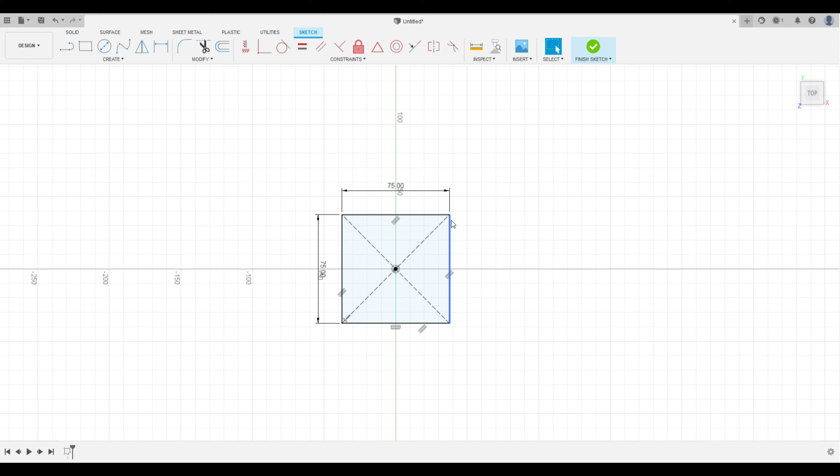Okay, so we're going to jump into Fusion 360 and we're going to jump into the sheet metal tab. Now this just literally needs to be a super simple gusset. So we're going to go with 75 by 75, which for our American friends is 3 inches by 3 inches. Finish the sketch, and then there's my sketch, flange, boom. Now we're going to be making this out of 3mm, so you're okay.

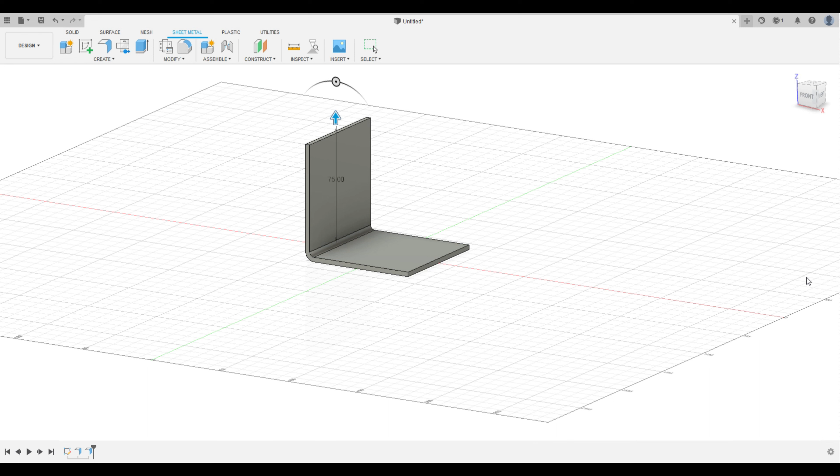Now this is going to flange up 75mm, and wait, I may have screwed that up. We want to bend that on the outside, and then these two sides we want to bend on the inside, which is going to be there. Okay, cool. Now as you can see, this then gives us tabs here where we can weld it. I'm going to hit OK.

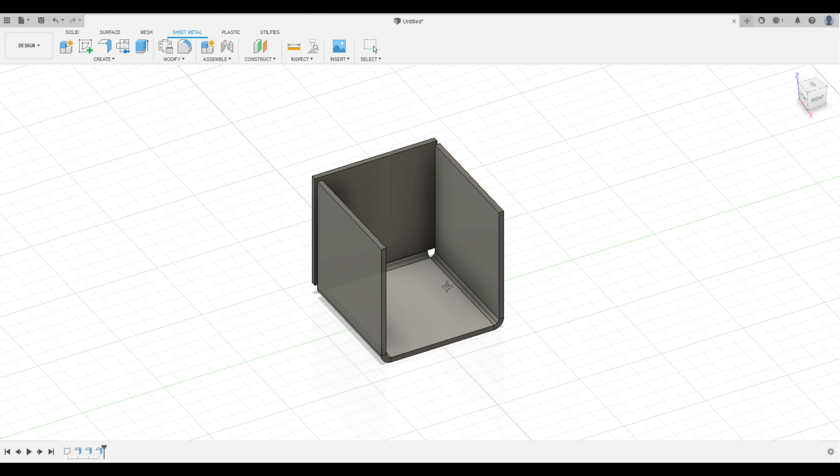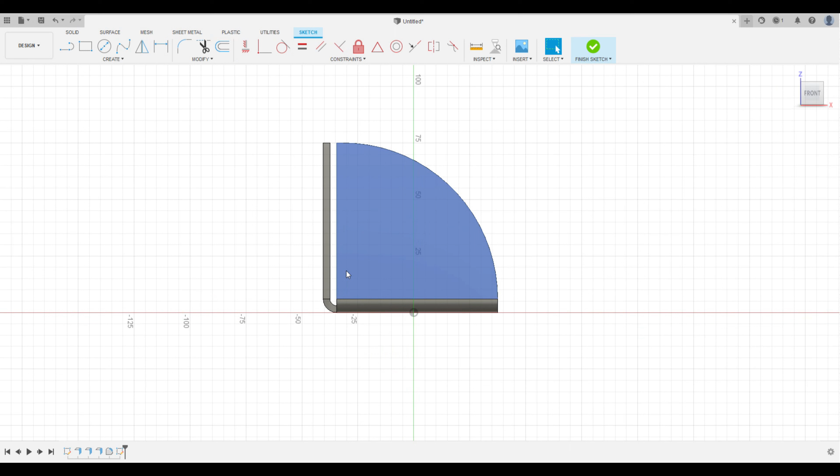Now also, just to make this a little bit stronger, I'm going to go to inspect that length, which is 69mm. Bang bang. And I'm going to fillet that corner like that. Create a sketch here. Find the centres. And there we go. 25. I don't want that. I want that as a construction line and that not as a construction line.

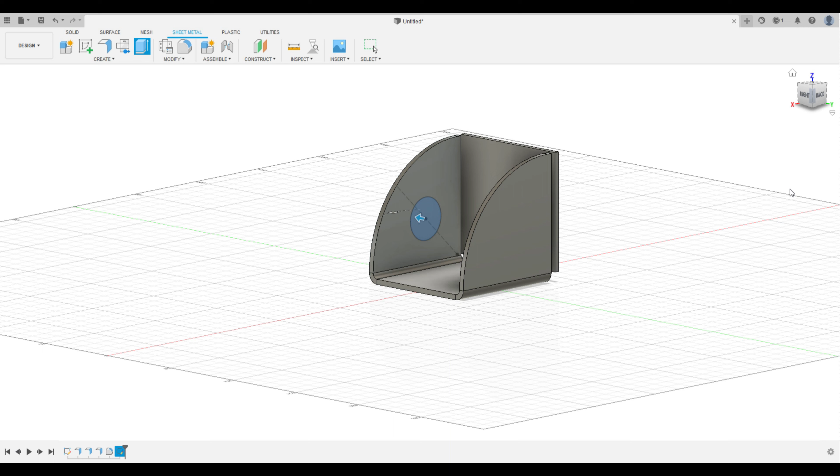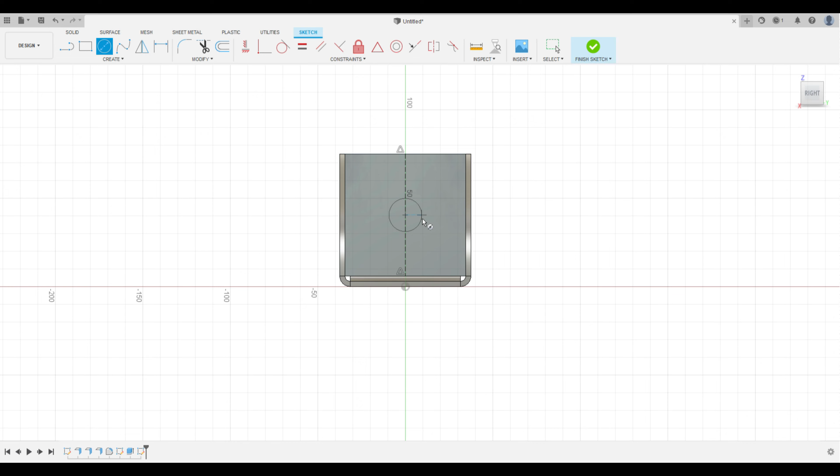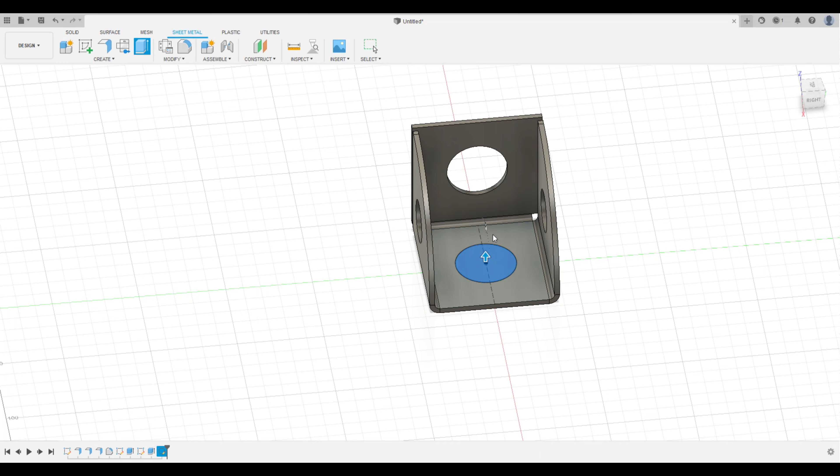Okay. Now I'm going to bring this to here. Cut that out. Okay. And now there is our gusset. Now the other thing I might want to do is I might want to weld a bit in the centre, so I'm going to go do that. Construction line there. 30, 35? 35 looks good. Finish. Alright, and sketch. As you can see, I'm not very good at this. Okay, cool. And there is our gusset. Very, very simple gusset drawn up.

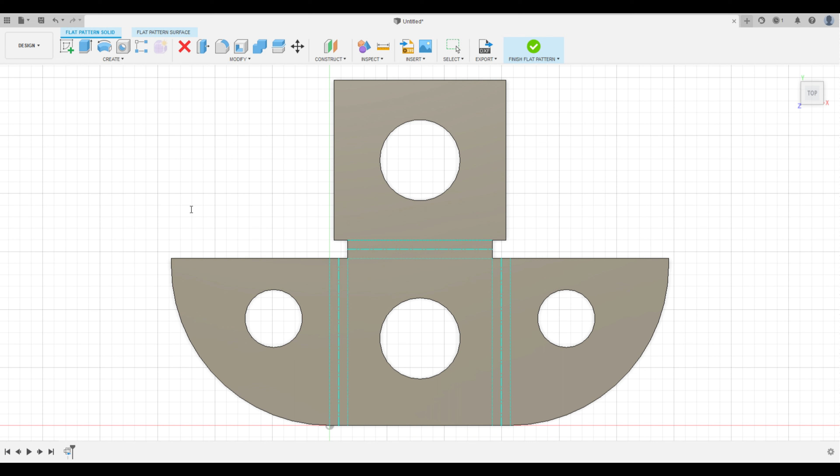So now I want to go up here to create a flat pattern, make that the flat face, and it does this. Now I can export this as a DXF. Okay, let's make this 75mm gusset. Okay, finish flat pattern.

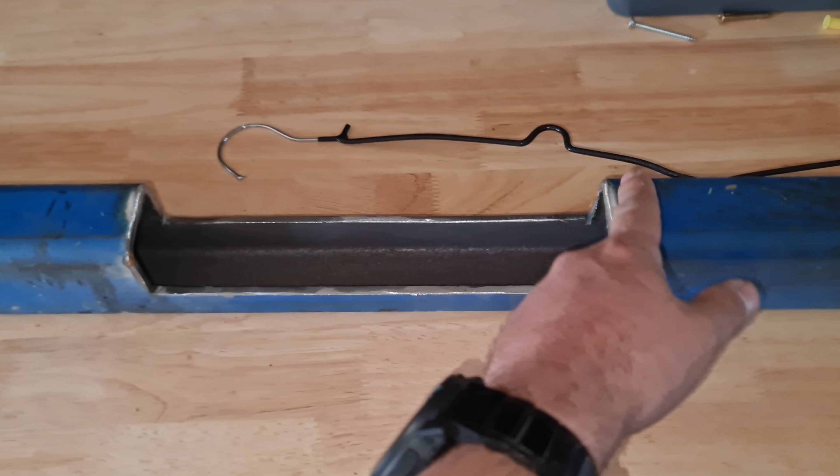And now the other piece we need to do is a reinforcement for here on the front engine mount. So what we're going to do is take some measurements from this and convert them into CAD, because this is the area where the radiator hoses need to fit. But now that I've taken a chunk out of the pipe, I need to put something back so it's a bit more structural. So let's get to that.

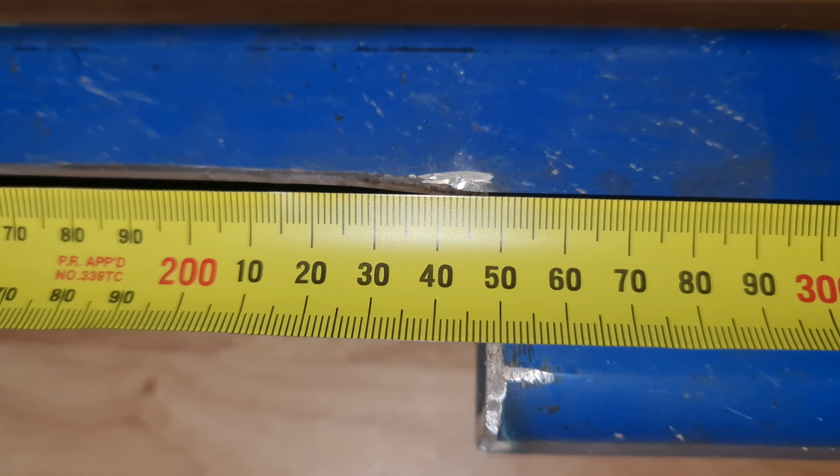Now I can see here I've gone around 250 mil. So I'm going to go with 245 on that distance, and then let's have a look. We'll go 40 and 40. So there are our distances, so let's jump back into CAD for this. Okay, so now we're back in CAD. Let's create our sketch again. This time we'll just go up here because that's the plane I was operating in. Go with 245, and I know it's 50mm high, which is just standard, and that is our shape.

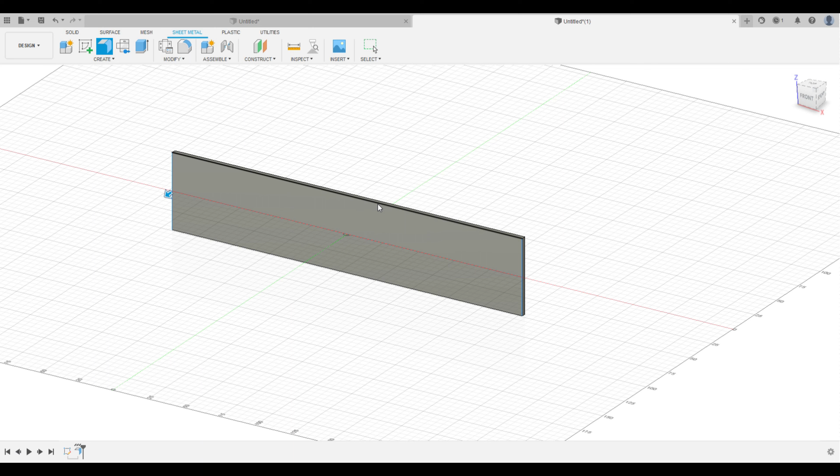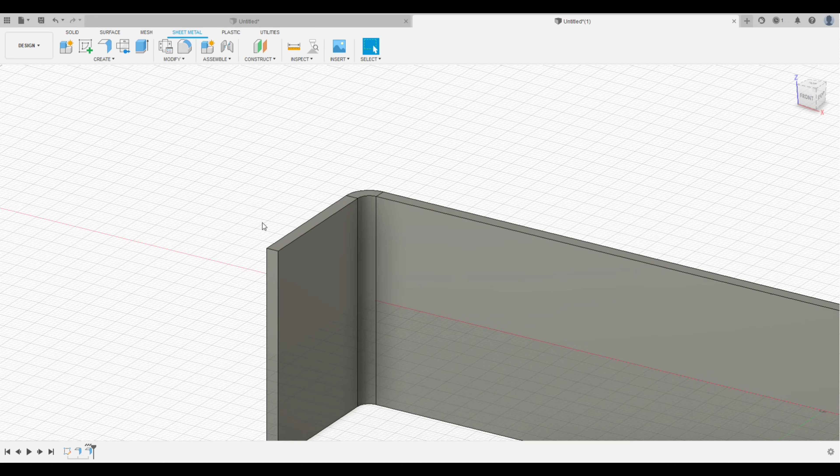So I go finish, flange, bring that out as 3mm, now a 3mm piece of plate. And now with these, I bring those both out, 40mm. I need to come over here and make sure this is on the inside. Because if I change it to outside, you can see it pushes it out, tangent or adjacent. So it moves your bend position just here, so I want those inside, because then I'll keep that same size. And I know that the fillet at the corners is 5mm. I can fillet all these corners 5mm, and that will make it all nice.

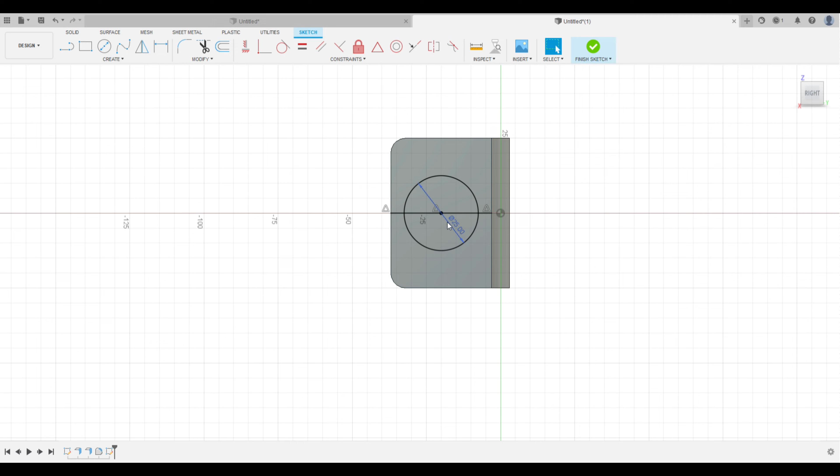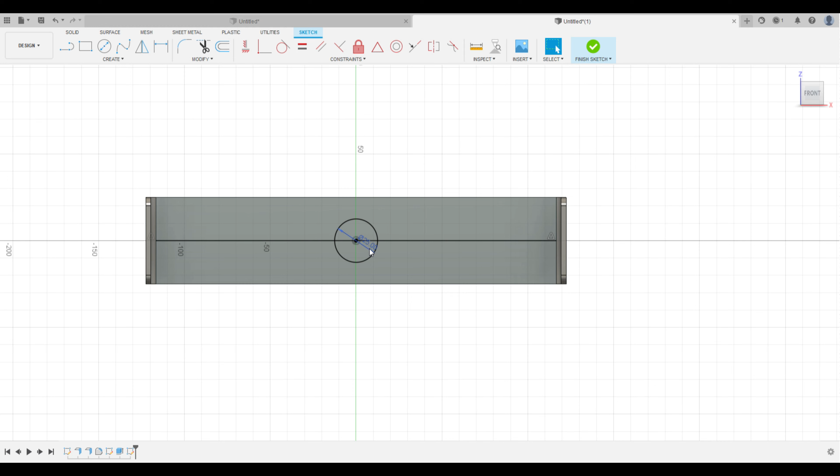Now let's do something else. It's going to be cool. Create sketch. Now I can fit in here a 25mm hole. Let's bring him all the way across here. Cut him out. Okay, let's go on here. Put more 25mm holes. Create pattern. Boom. Actually, how long is this? Measure 233. Okay, cool. Right.

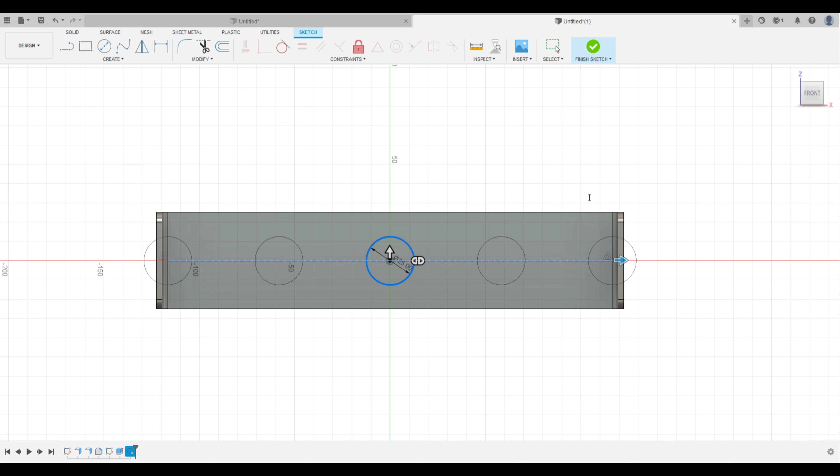Pattern. Directions that. Distance 233 divided by 2. Symmetric. Divided by 4 because I'm going both ways. Alright, that is cheap. Yep. And then 25mm, so minus 50. 25. That looks better. Okay, let's get these done. Okay, cool. And now that will be a bracket. Actually, yeah, I don't know if that's going to work for what I plan to do, but let's see.

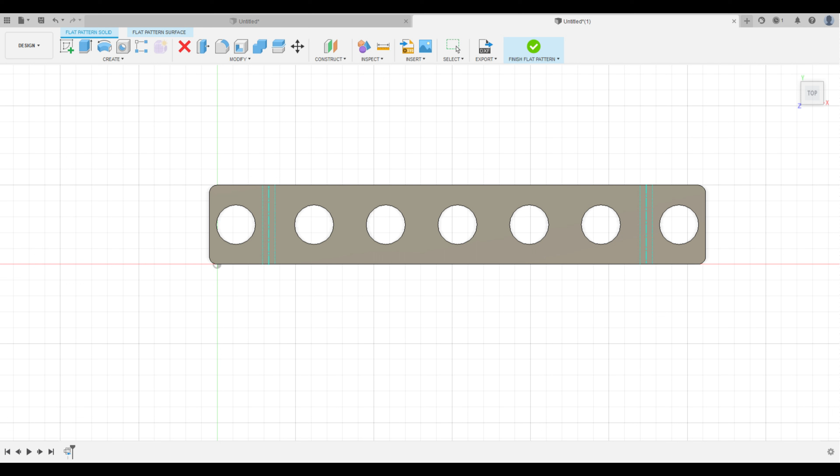So go back up here, create flat pattern, select there. Cool. Export. Okay. And front subframe reinforcement. Okay, finish flat pattern. Okay, cool. And that is our 2 reinforcing panels.

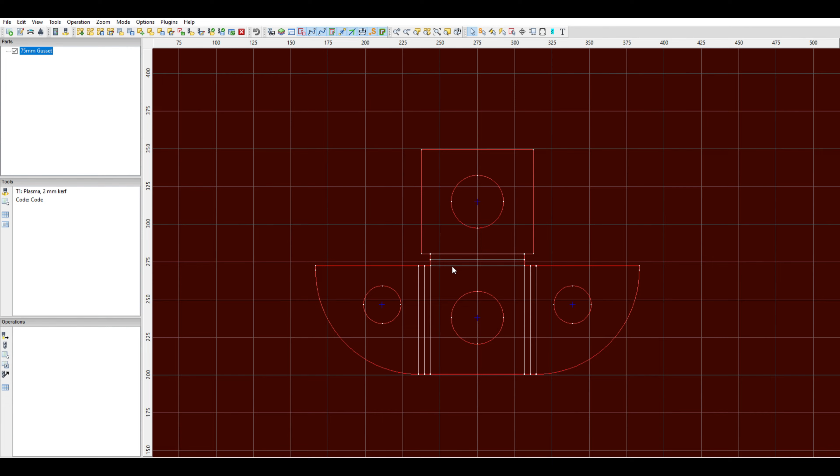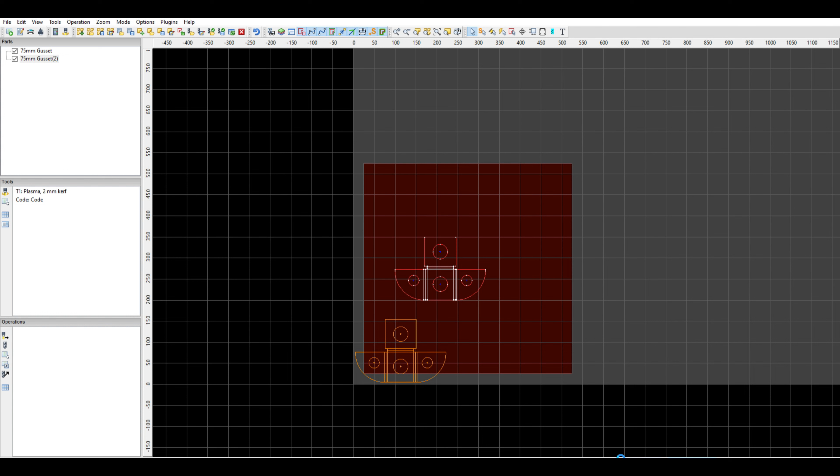Okay, now for the next trick, I need to open up this nifty program called SheetCAM. New part, 3D objects, and I want the 75mm gusset. Okay, cool. I want to make him 5 and 5 away from the edge. And I want a new part, I want another 75mm gusset. And let's go with, let's flip him upside down. Okay,

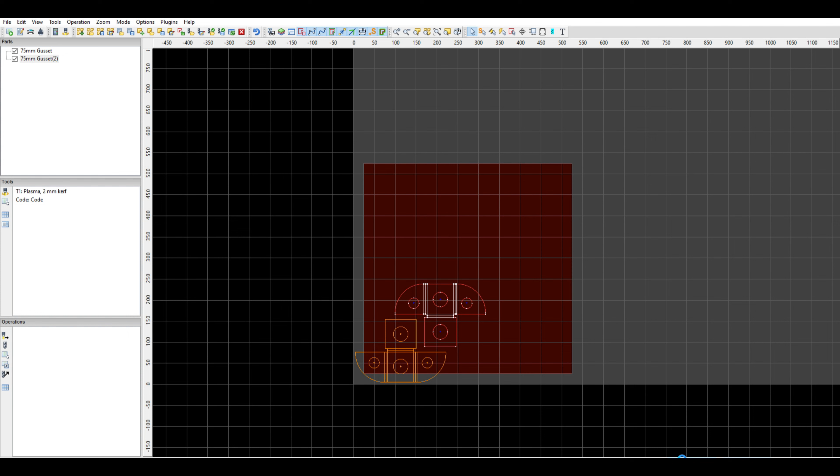150, walk him in, 100, 5, not too close, and let's go 80, 90, that works, 90 and 90, that works, and then go front subframe reinforcement. Okay, we'll bring him across, 240, 250, okay, cool. Now he's there. Okay, cool. We have those parts. Now I might actually swing him 90 degrees. Bring him back across.

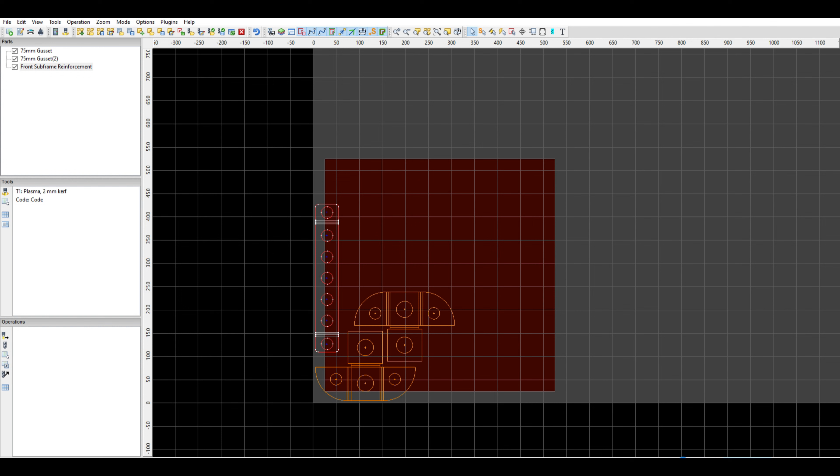Okay, cool. Put him there. Okay. Now that gives us those. Now let's set up our toolpaths. So we go down here, plasma cut, because I'm going 3mm. I'm going to slow it down to 1250.

Now I want to go inside on my inner profiles. Okay. I want to select the next one. Create another operation. Inside inner profiles at 1250. Yep. And inside inner profiles 1250. Okay, cool. Then go back to the first one.

Outside outer profiles. Cool. And then go outside outer profiles. So you always want to cut your insides first and then your outsides. Because if you cut your outsides first, then these are all flopping around, and you'll see what I mean when I cut them out in just a moment.

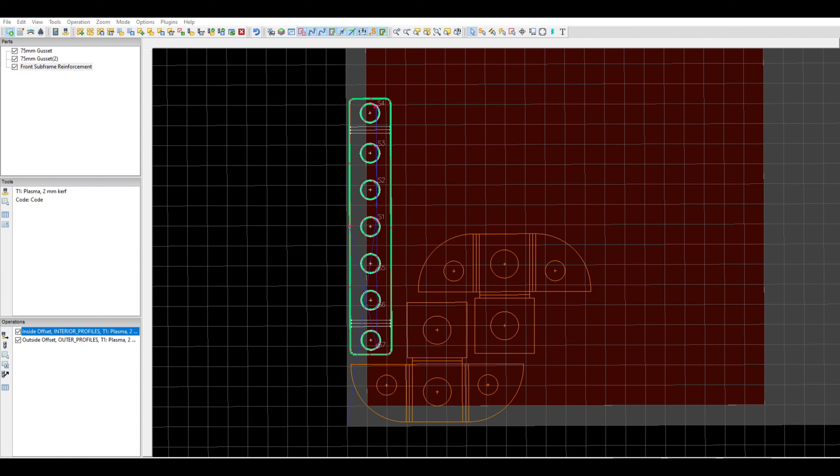So I'm going to run my post processor, go to desktop, go in here, front reinforcement parts, save, post processing completed. Okay, cool. And let's go see what this is going to do for us.

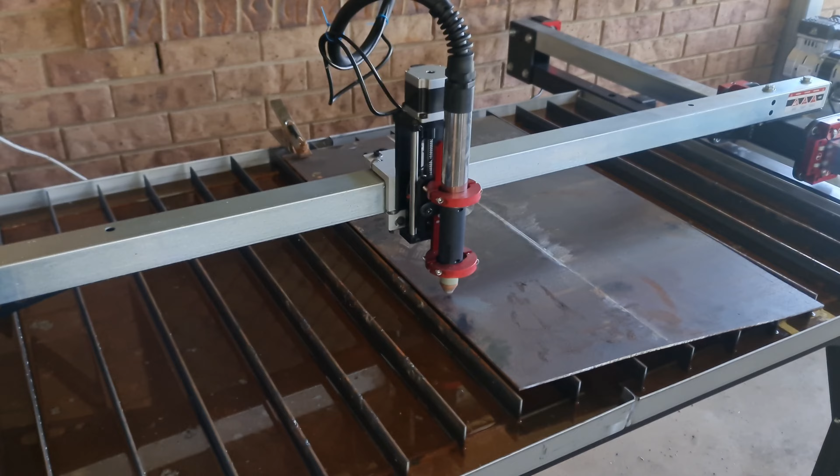Okay, so this is the new toy, and I've currently got it doing a test run just so I know that everything's going to fit into my panel, because I can't actually buy panels to suit this machine with 4 foot by 3 foot. So I've got to cut them down, and I'd already cut into this panel, so I was going to just use some offcuts from the panel before I go wrecking a whole brand new panel.

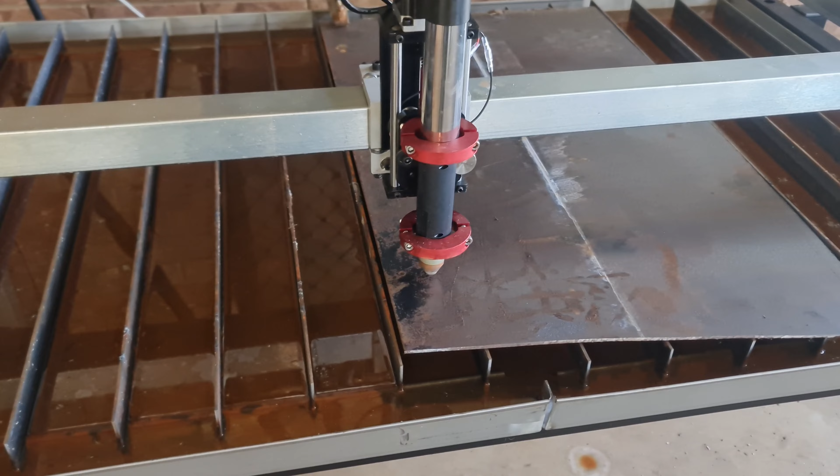So it looks like this whole thing is going to fit. So it's just finishing up its cut now. So let's wait for a second and we'll get the actual cut started. Okay, so we're ready to go. I'm going to hit start. And let's see what it does.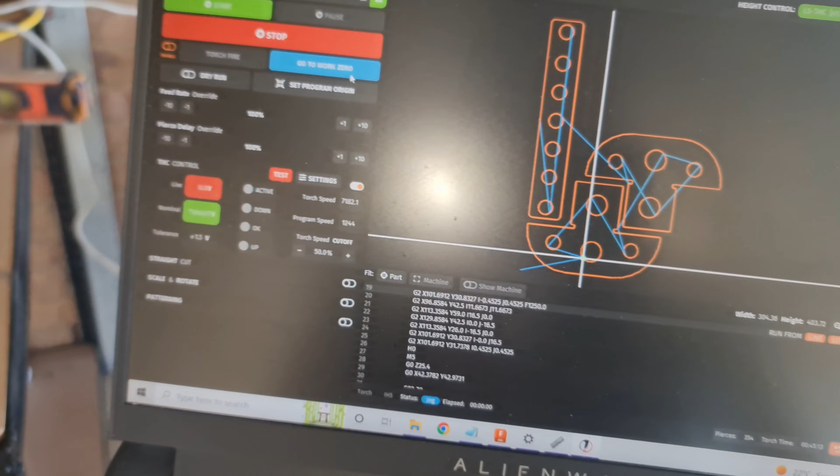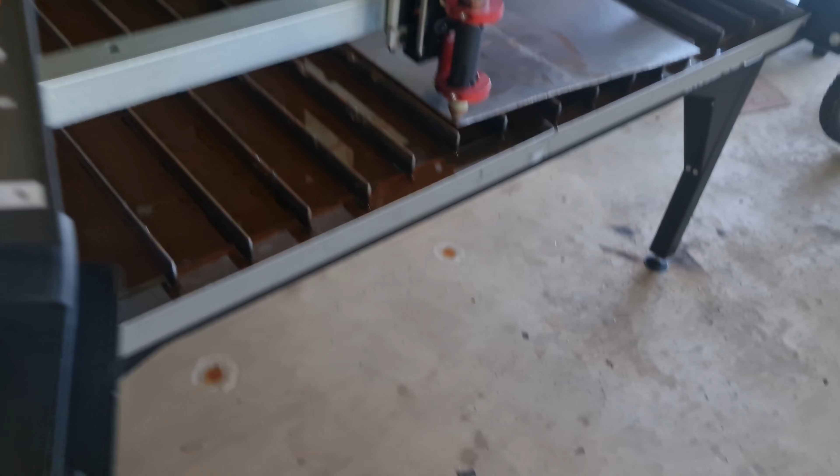Oops. That was my screw up. Reset. Go to work 0. It helps if I do this. Turn the plasma cutter on. Okay, it's back at work 0. See if this actually works better now. Oh, look at that. I'm going to slow this down just a little bit. And maybe a little bit more.

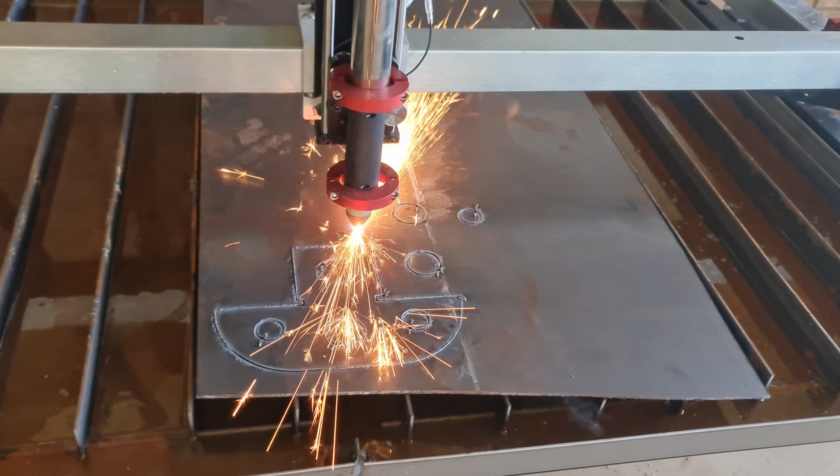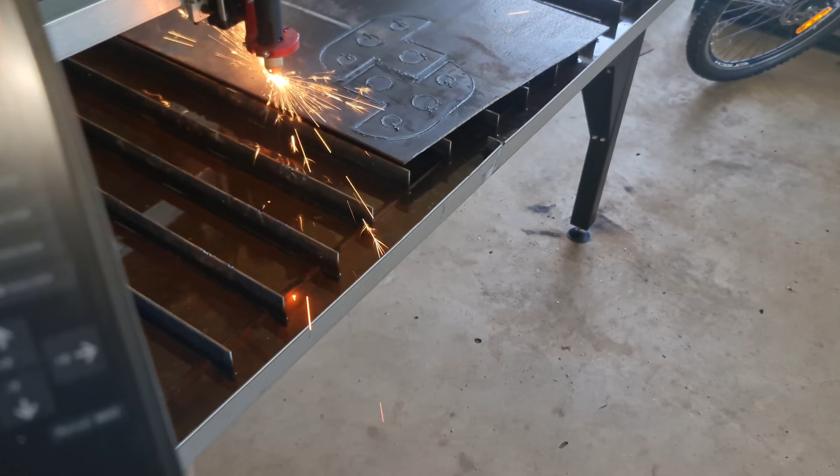Also, while I'm doing this, you're actually seeing more than I am, with my fancy safety goggles on. Okay. First gusset done. I think I need to go even slower. This is just honestly the coolest toy that I own.

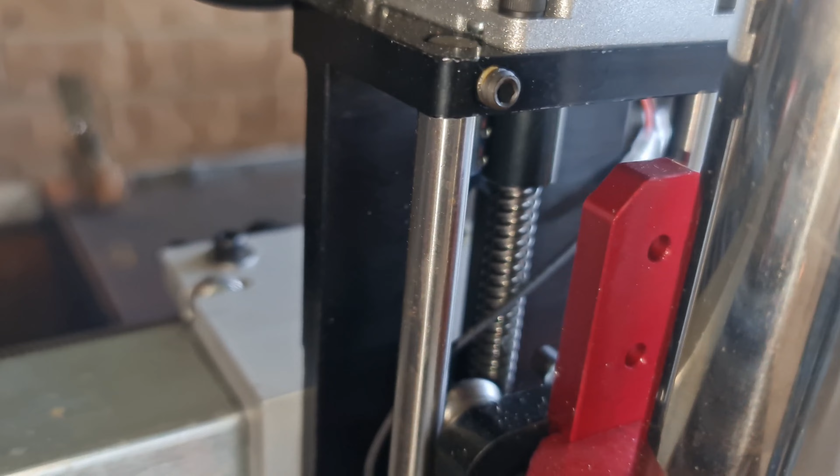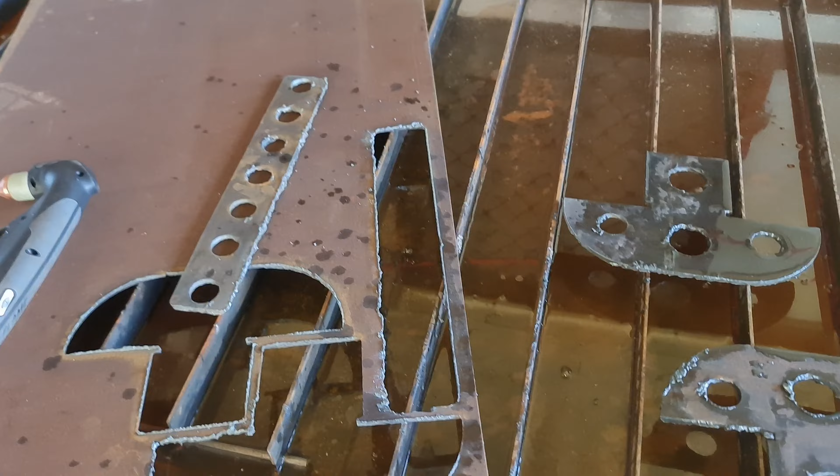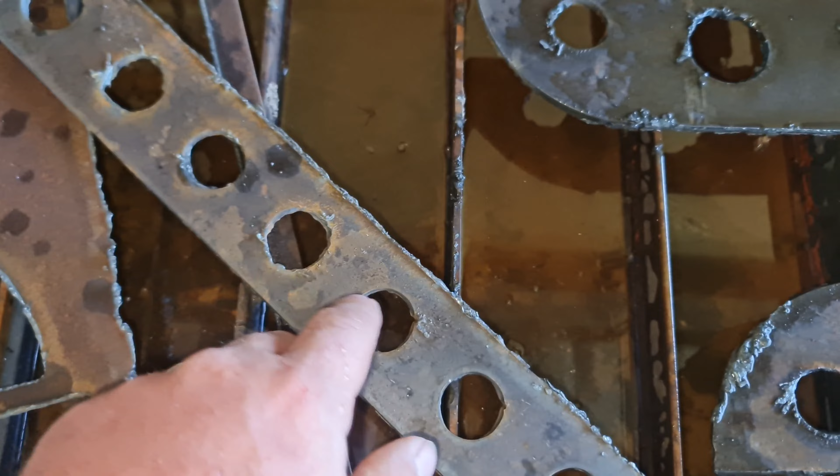Okay, program is complete. It will be reset. Okay, and in the interest of full transparency, I had to get out the hand torch because none of these cut through the whole way. Oh, some of them did. A couple of these ones cut through the whole way, but most of this did not cut through the whole way, so therefore I ended up ruining the edges of some of them.

But that's not really going to matter because I can grind it up, make it look reasonably pretty, and it will be functional, because that's the thing, these parts need to be functional, they don't have to be perfect. So yeah, I had to hand torch some of them out. So yeah, that's life. Now let's go down the shed, clean these up and get them bent.

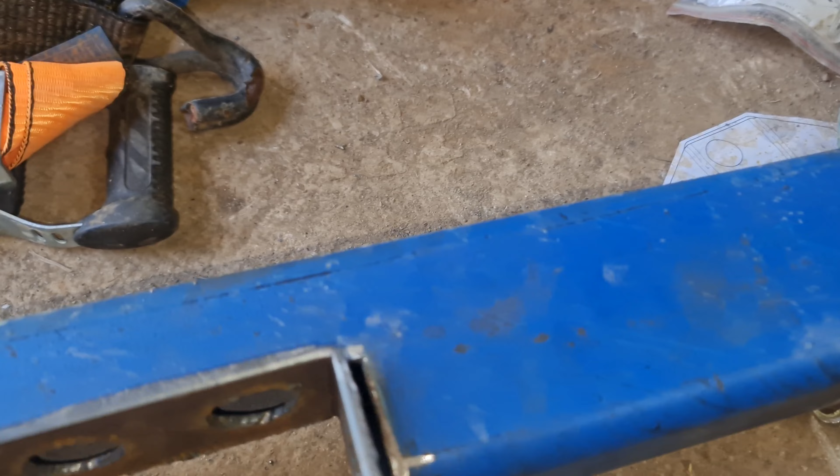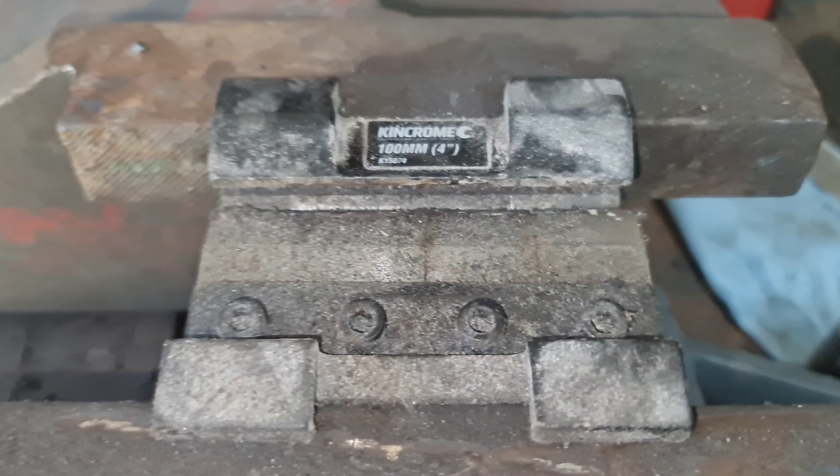Okay, so I got the first bracket cut up, and she's just a slight bit out of size, but nothing that can't be taken up with a bit more weld. So yeah, she looks good. I have to say this little vice brake has been absolutely phenomenal. I think I paid like 30 bucks for it at Super Cheap, and it just bends 3mm like it's going out of fashion. So it's a great little tool.

Anyway, so that's it for today. I just wanted to basically show off my new CNC plasma cutter and just show how easy it is to make brackets now. So hopefully this project will get moving very quickly.

I need to bend up the other brackets, put the brace back into the engine bay, bolt it to the K-frame, lift everything into position, tack the gussets onto the K-frame, onto the brace, pull it all back out, weld them fully, put it back in and weld them to the car. So that's going to be an entire other episode, because this episode's already been long enough.